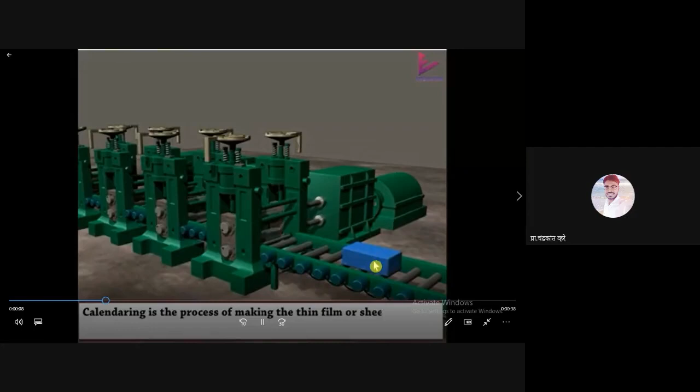Initially, if you observe here, the solid plastic raw material, these are the rollers, this is the motor for rotating the roller, and this is the roller conveyor. Because of this roller, the material is getting movable.

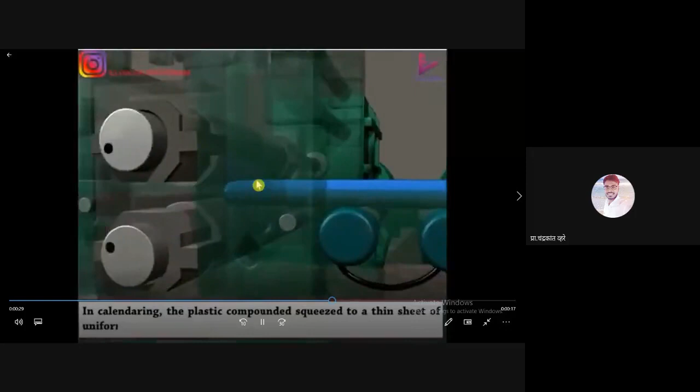Now you are observing, while going through the different roller combinations, we are getting the thin size. Now observe the material, this is how the plastic sheets are manufactured.

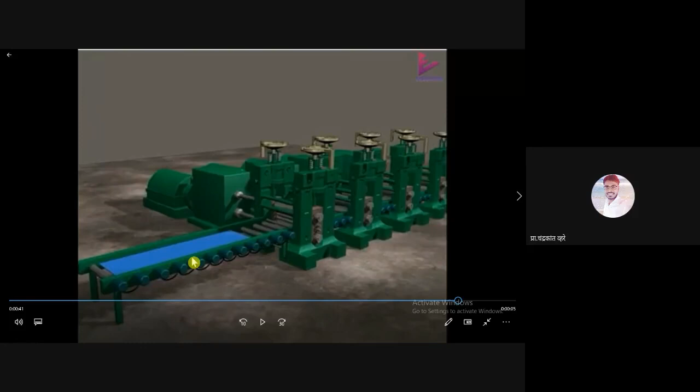This same method is used for metal material also, but the only difference is that here also we use hot material, and in the metal case also we use hot material. But nowadays, due to stress concentration and trace formation problems, what we are doing is making the sheet from colder material. So nowadays this is advanced technology, but maximum times hot materials are rolled.

Once again see the video. So this is the structure: first roller set, second roller set, third roller set, and this is the fourth roller set.

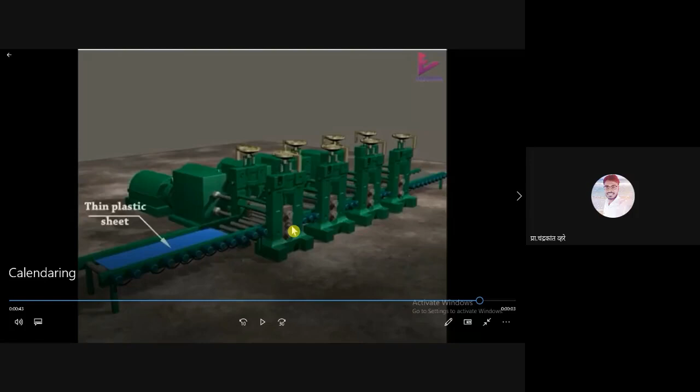At the first roller set, the distance between the two roller centers will be more. Here the distance between the two roller centers will reduce, and finally whatever thickness is required, that will be the center distance for this roller combination. Okay, so this is the case, once again just to see the video.

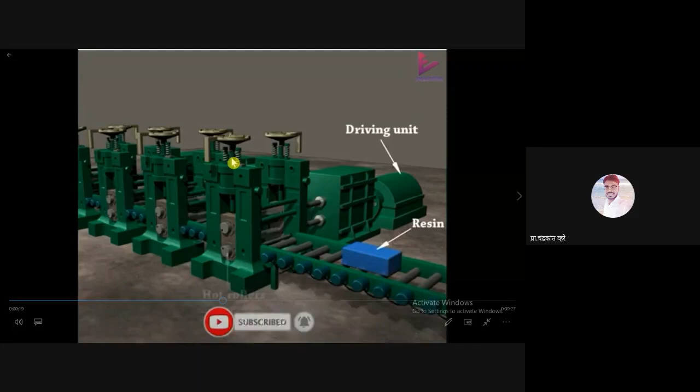So calendering, this is calendering, or we can call it a sheet forming process. This is a motor, and this is the adjustment. Above, you are observing this screw now, this screw is for adjustment purposes. In lathe also, whatever the same wheel we use for adjusting, same wheel here we have.

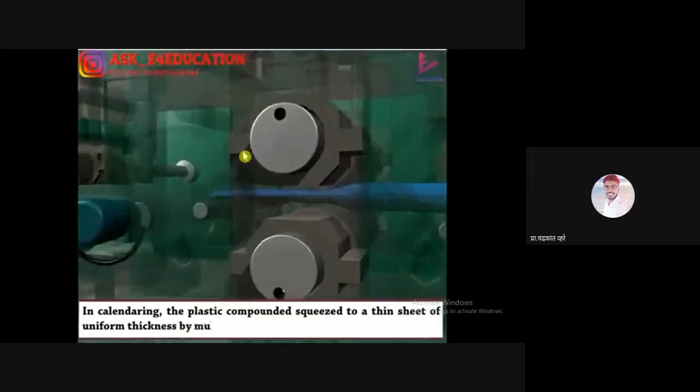So how the size is getting reduced, again reduced, again reduced, like this. So this is not a difficult process. This is the calendering process.

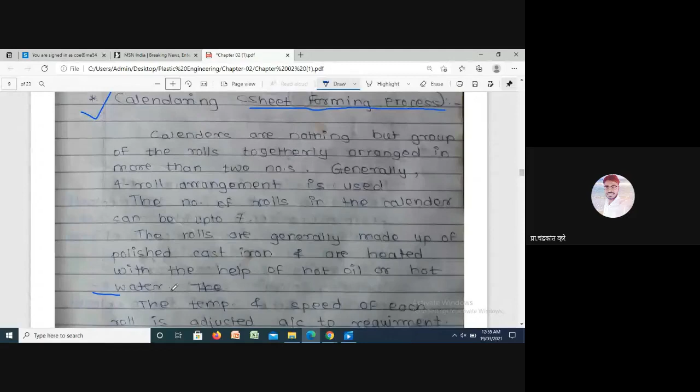Okay, so go for this paragraph. Write down: the temperature and the speed of each roll is adjusted according to requirement.

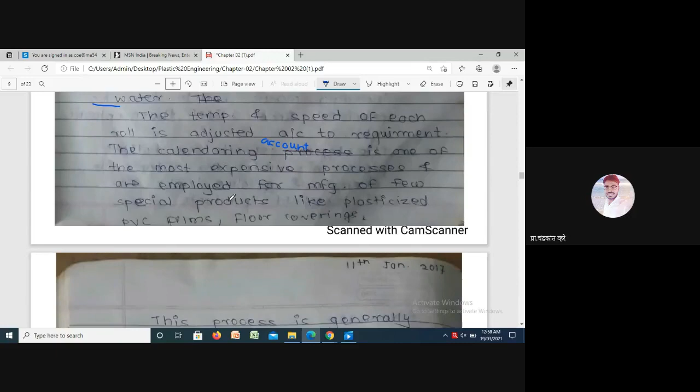Just draw this diagram. So this roller will come like this.

The material will flow like this, into the rolls. Okay, so these are the rolls, heated rolls.

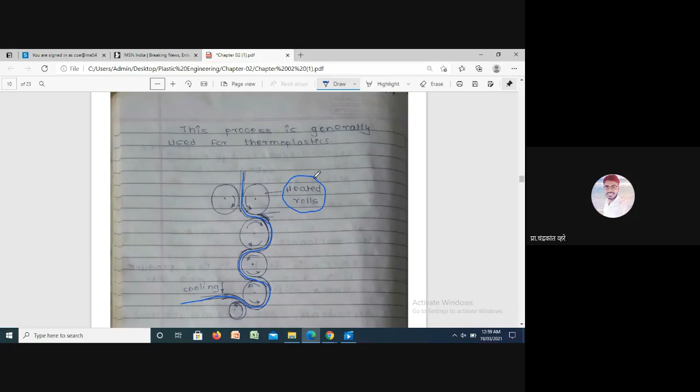If you observe in metal, at that time we are heating the metal, but in plastic, sometimes in some cases we are heating the plastic up to some level, and majorly we are heating the rolls in plastic, but in metal we are heating the raw material. So this is one major difference between metal and plastic. You guys have to consider this.

Draw this diagram, calendering. So this is a small and important point, calendering.

So plastic thing is not difficult. We just have different processes, different molding processes, different materials, and all about this. So it's not just we need to understand the process. Draw this first, draw this fast.

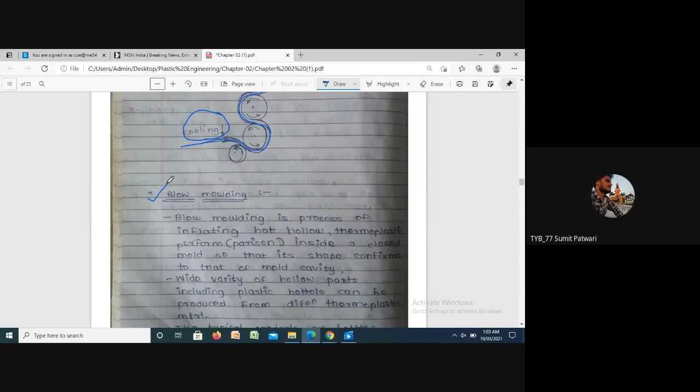Okay, so next point is blow molding. Now we'll see how blow molding is working. So what is the process? We'll see one animation video, so you guys will understand each and everything. It's not difficult, it's okay. Go for the video.

By simple animation, you will get understood. Okay, so we have the video on blow molding. Okay, see the video.

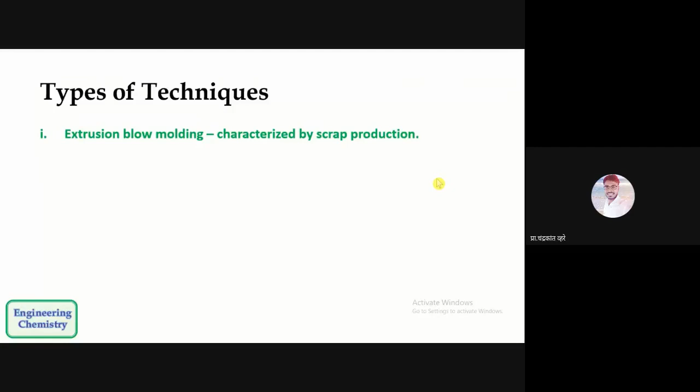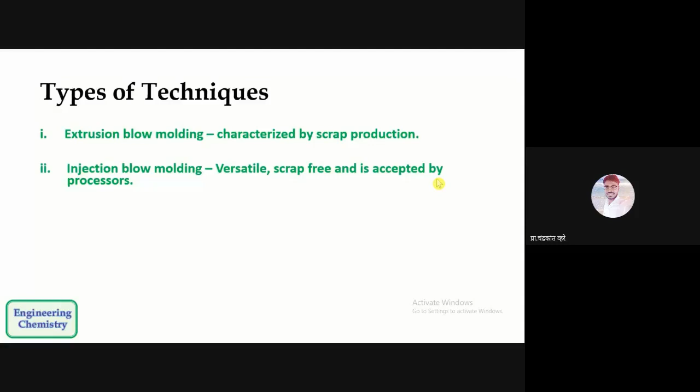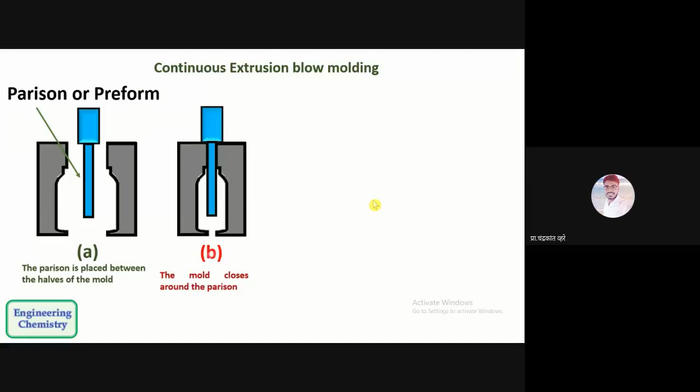Okay, so let's see the process. I thought I have already shown this video to you guys, but again you just see it. So how does the blow molding work? This is a continuous extrusion blow molding.

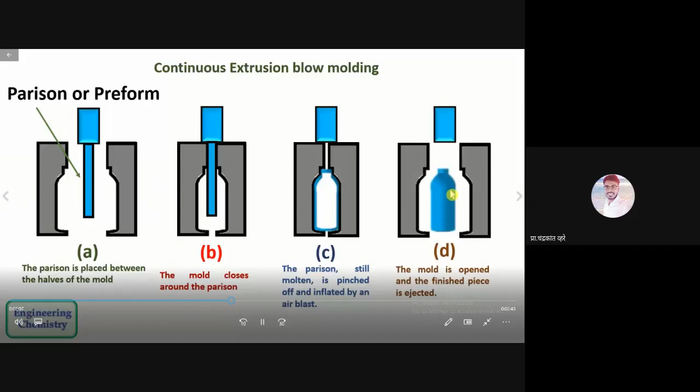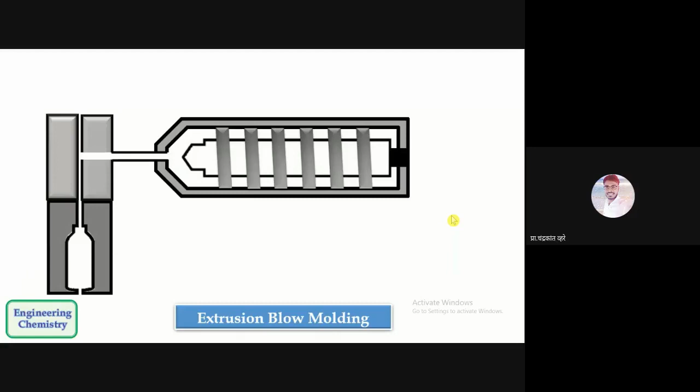So such bottles we can manufacture by using this blow molding. Okay, so this is a complete animation.

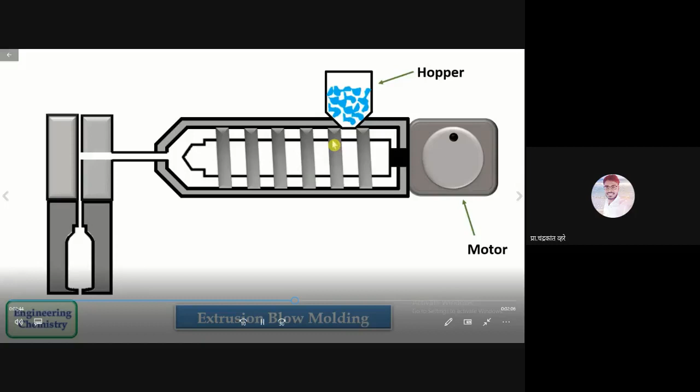Here this is mold, we have seen in the previous slide. So this is a mold. This is motor, this is hopper. Here we will place some plastic material, and by using this motor and this screw conveyor, we are just forcing. This is screw conveyor. Due to this motor, we are just forcing this plastic material towards this molding.

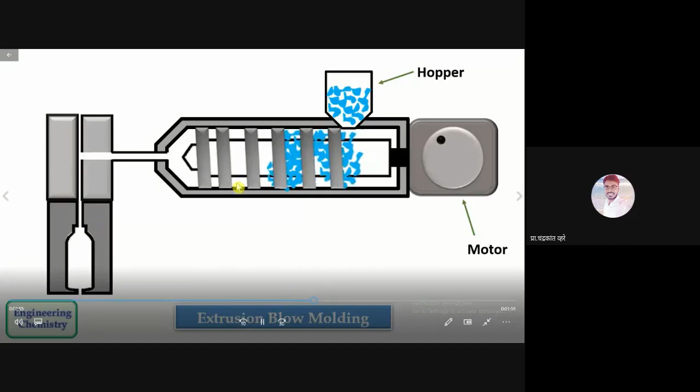Okay, so now you see here, and this is heated. Here we'll get liquid plastic. After some time we'll stop this forcing, and by pressing this air into this mold from the top side, we are just forcing this material to this side, like this.

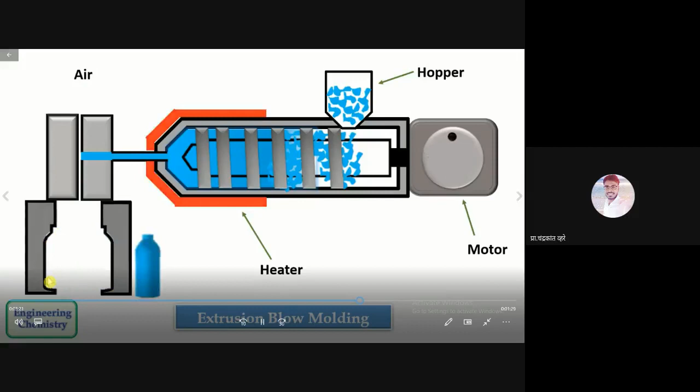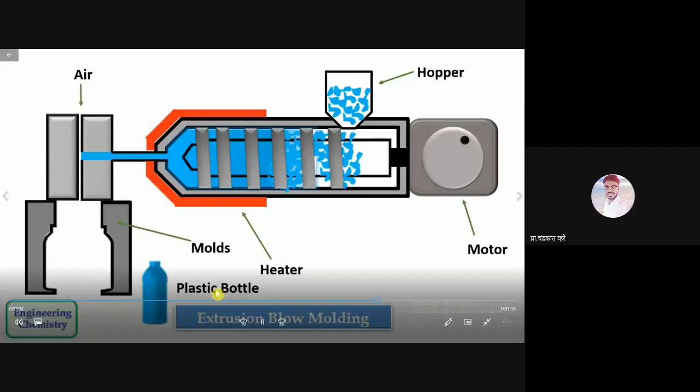Okay, so this is extrusion, majorly. Again once more, you just see this process, so you'll get all things clear.

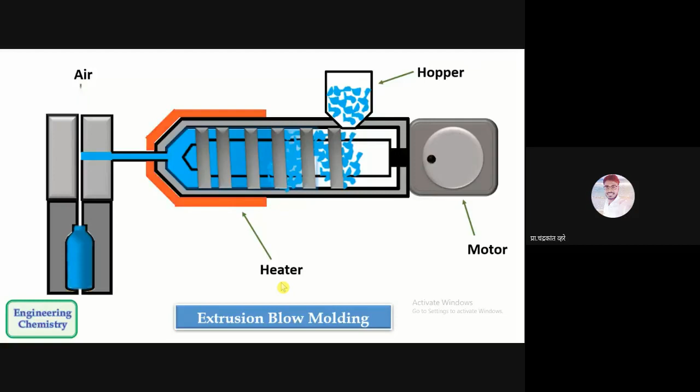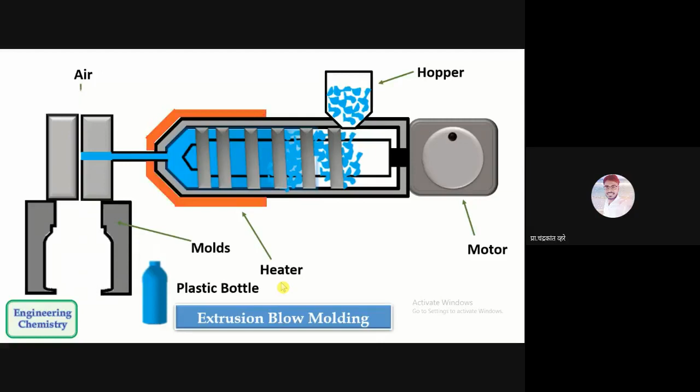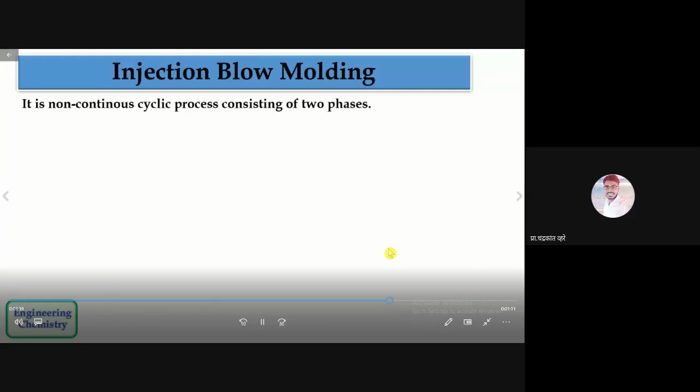For bottle manufacturing purposes, we are using the blow molding. This is extrusion blow molding. Now go for the injection blow molding, go for the animation of injection blow molding.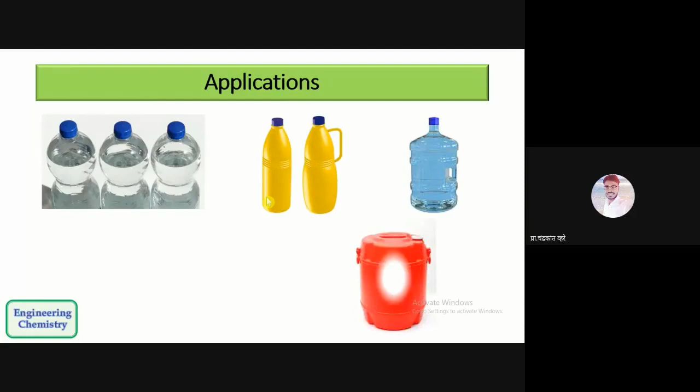Blow molding is a process of inflating hot hollow thermoplastic preform, or we can call it parison, inside a closed mold so that its shape conforms to that mold cavity. Just the theory, now what we have seen, so nothing major. Write it, write on this page fast. Write down, give the heading blow molding, and write down this.

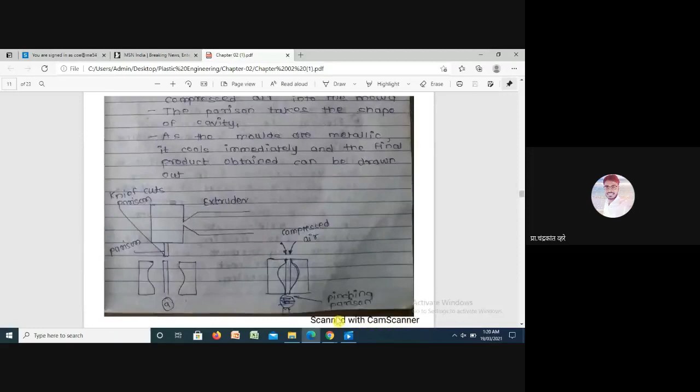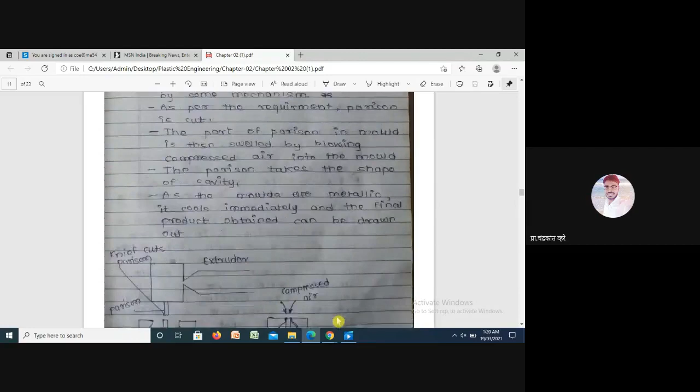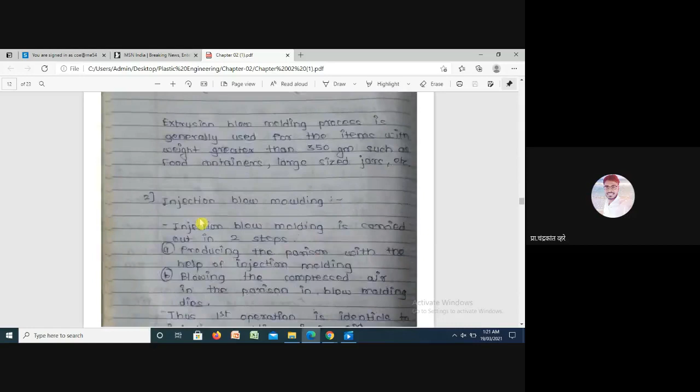Okay, so whatever now we have seen in the animation, now so all data just we have theory. Now if you see, we have seen in animation the extrusion blow molding, how the extrusion blow molding is working. So just now we have seen this molding process. So this is just how the parts are getting manufactured. Next, injection blow molding, now we have seen it.